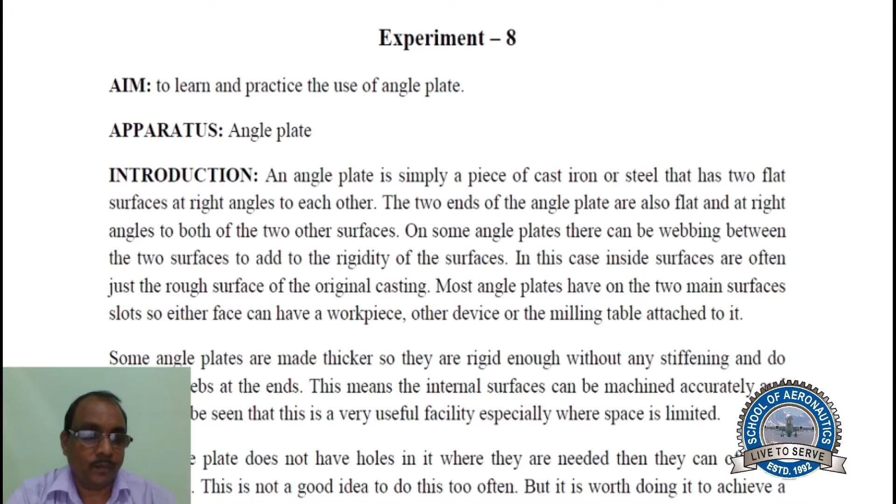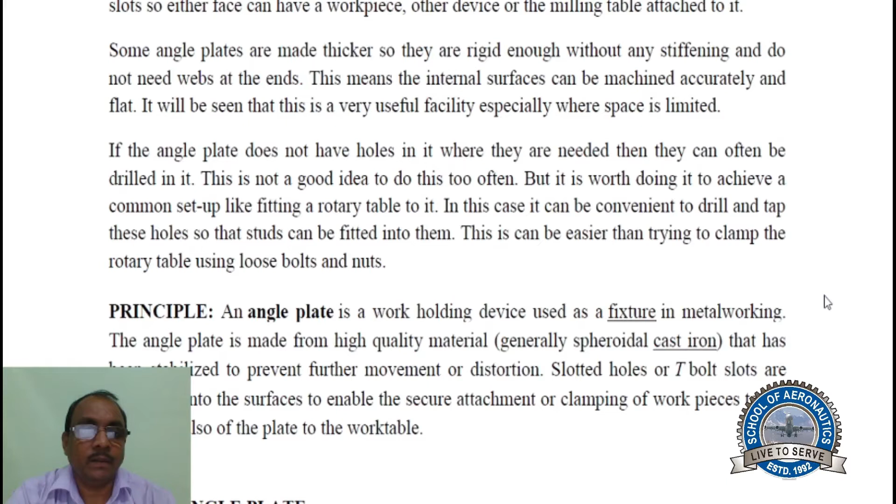If the angle plate does not have holes in it where they are needed, then they can often be drilled in. This is not a good idea to do too often, but it is worth doing to achieve a common setup, like fitting a rotary table to it. In this case, it can be convenient to drill and tap these holes so that studs can be fitted into them.

This can be easier than trying to clamp the rotary table using loose bolts and nuts.

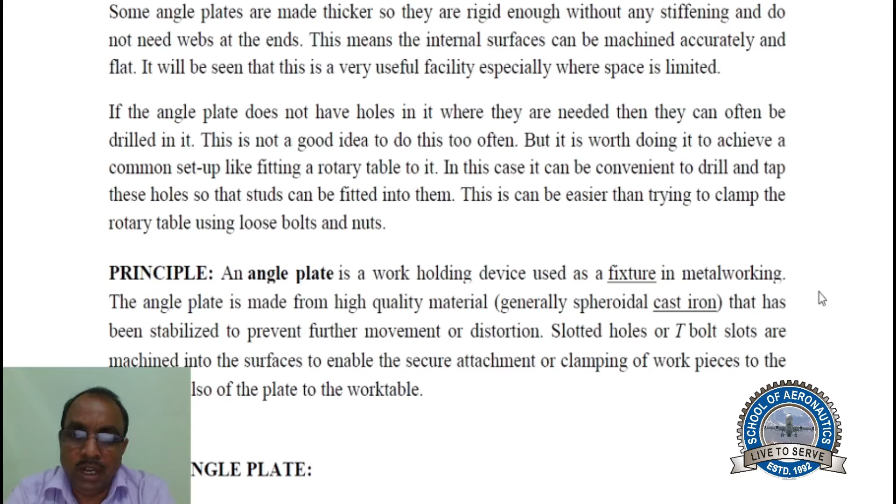Principle. An angle plate is a work holding device used as a fixture in metalworking. The angle plate is made from high quality material that has been stabilized to prevent further movement or distortion.

Slotted holes or T-bolt slots are machined into the surfaces to enable the secure attachment and clamping of workpieces to the plate, and also of the plate to the work table.

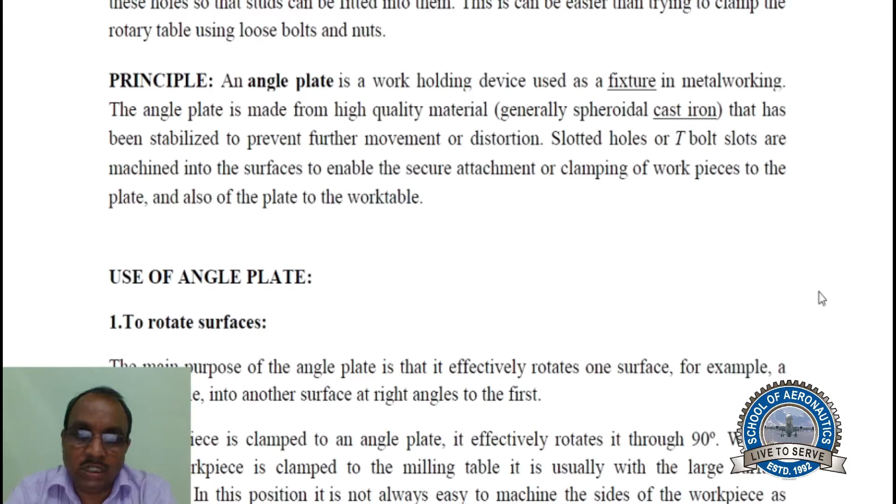Use of angle plate. First, to rotate surfaces. The main purpose of the angle plate is that it effectively rotates one surface, for example a milling table, into another surface at right angle to the first. If a workpiece is clamped to an angle plate, it effectively rotates it through 90 degrees.

When a flattish workpiece is clamped to the milling table, it is usually with the large surface horizontal. In this position, it is not always easy to machine the sides of the workpiece as might be required. But if we use an angle plate to turn it through 90 degrees, we can easily machine the sides.

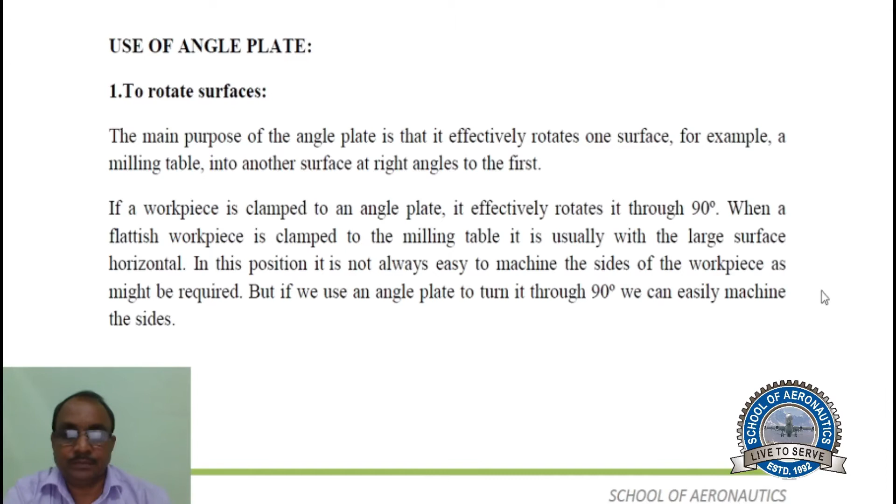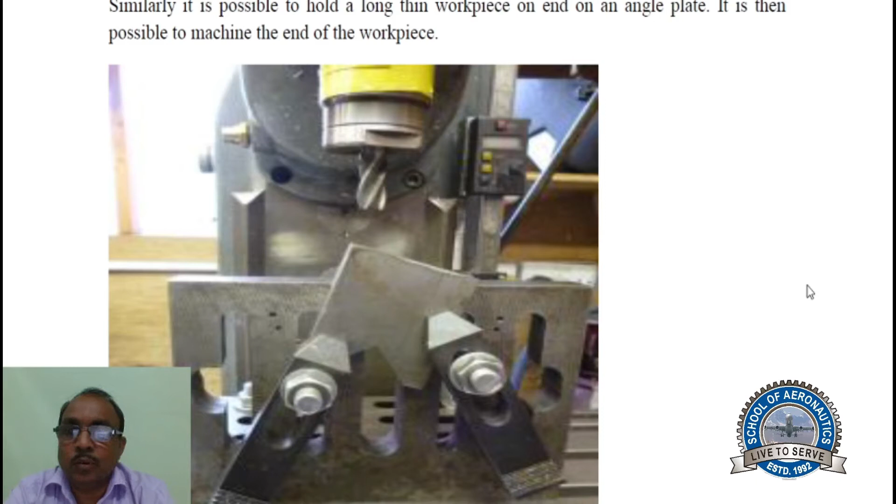Similarly, it is possible to hold a long thin workpiece on end on an angle plate. It is then possible to machine the end of the workpiece. This shows holding a workpiece on an angle plate to machine its sides.

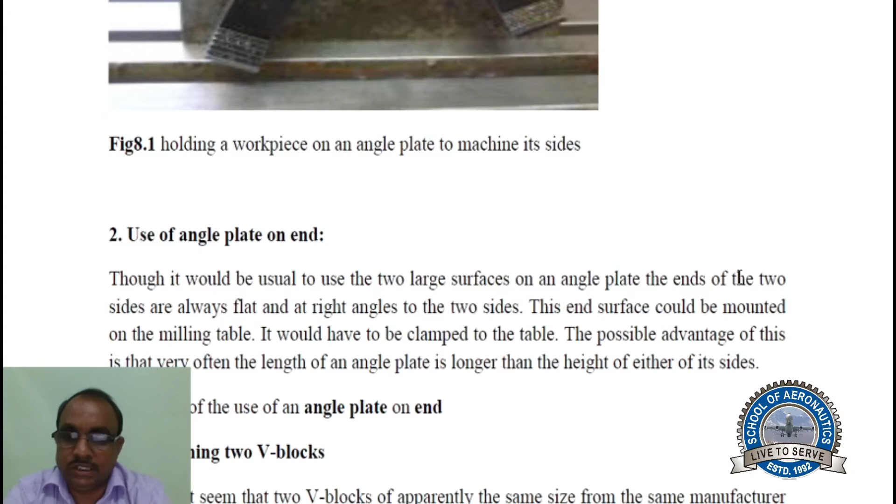Use of angle plate on end. Though it would be usual to use the two large surfaces on an angle plate, the ends of the two sides are always flat and at right angles to the two sides.

This end surface could be mounted on the milling table. It would have to be clamped to the table. The possible advantage of this is that very often the length of an angle plate is longer than the height of either of its sides.

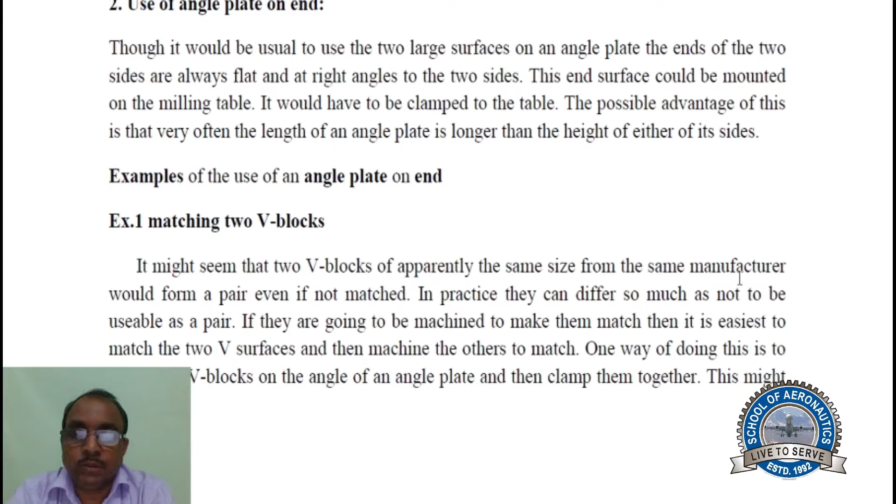Examples of the use of an angle plate on end. Example 1: matching two V blocks. It might seem that two V blocks of apparently the same size from the same manufacturer would form a pair even if not matched.

In practice, they can differ so much as not to be usable as a pair. If they are going to be machined to make them match, then it is easiest to match the two V surfaces and then machine the others to match.

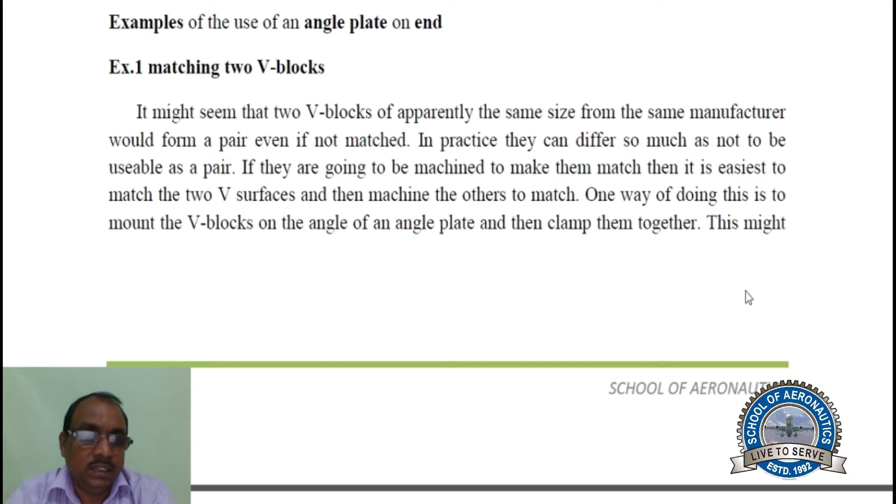One way of doing this is to mount the V blocks on the end of an angle plate and then clamp them together. This might necessitate drilling holes in the webs so they can be bolted together.

Then the other surfaces on the V blocks can easily be machined to match each other.

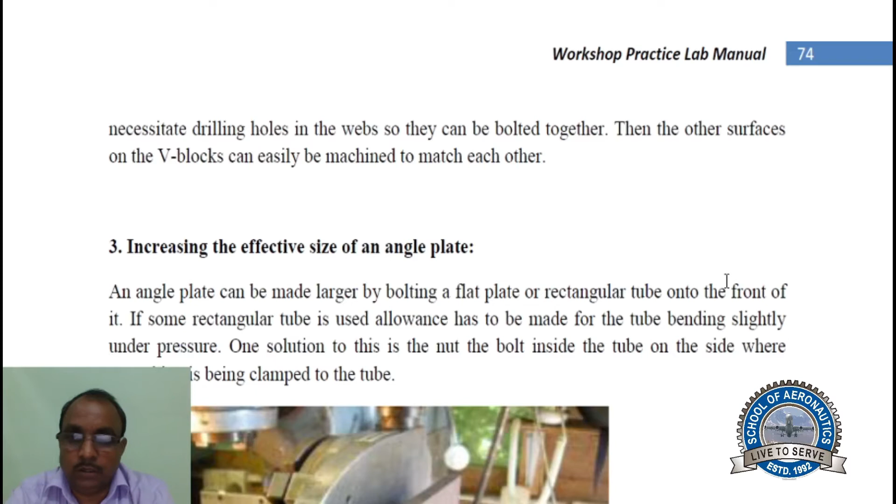Increasing the effective size of an angle plate. An angle plate can be made larger by bolting a flat plate or rectangular tube onto the front of it. If rectangular tube is used, allowance has to be made for the tube bending slightly under pressure.

One solution to this is to nut the bolt inside the tube on the side where something is being clamped to the tube.

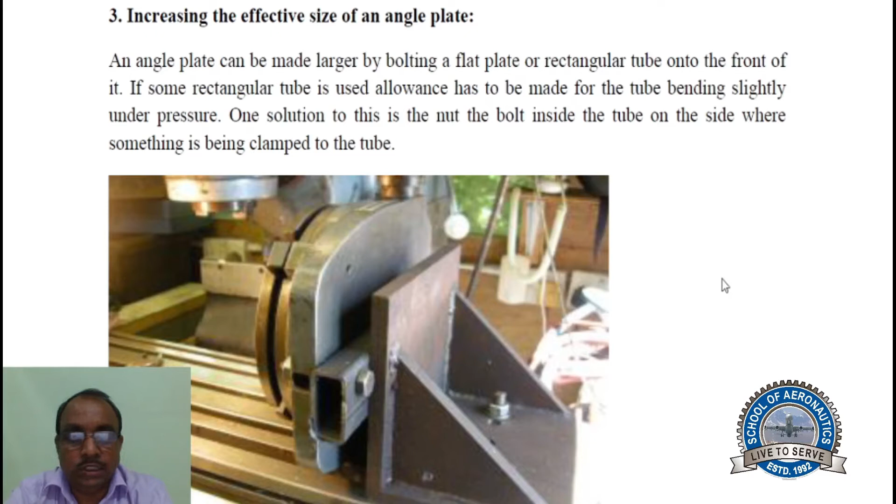Use of an angle plate for aligning. An angle plate can be seen as being equivalent to a square but of much greater thickness. Because of this, it can be used to align two edges at right angles but where one is at a different height to the other. This can be used for aligning vices.

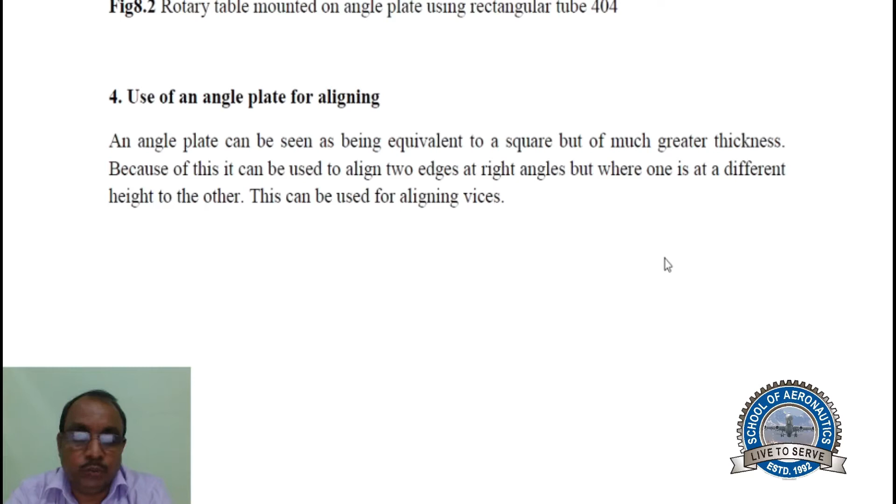Use of an angle plate as a stop. An angle plate bolted to the milling table to one side of a vise can be used as a stop when holding a workpiece in the vise. There is more on this under vices.

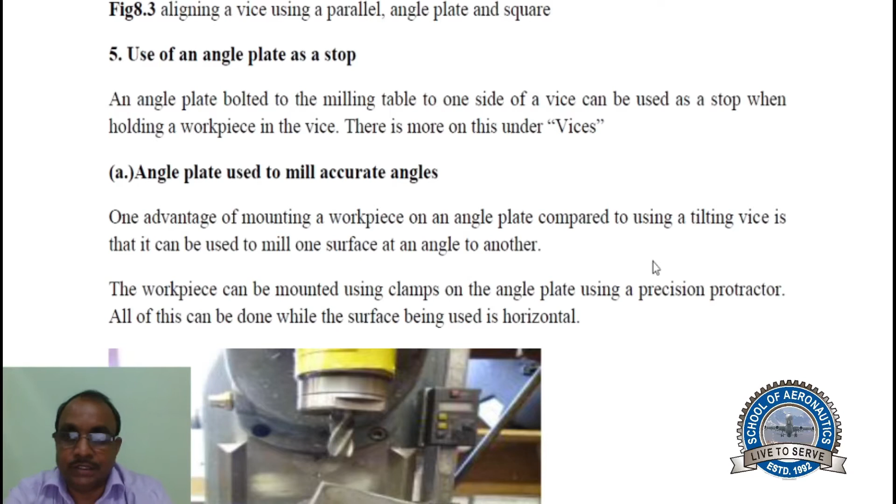Angle plate used to mill accurate angles. One advantage of mounting a workpiece on an angle plate compared to using a tilting vise is that it can be used to mill one surface at an angle to another. The workpiece can be mounted using a clamp on the angle plate using a precision protractor. All of this can be done while the surface being used is horizontal.

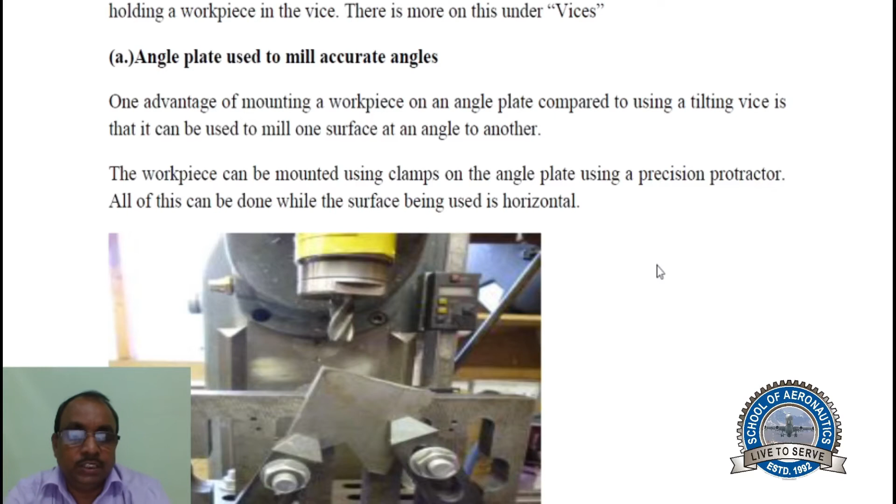Any method that could be used to align a workpiece clamped on the milling table, such as fences, could be used here. Machining flutes on connecting and coupling rods.

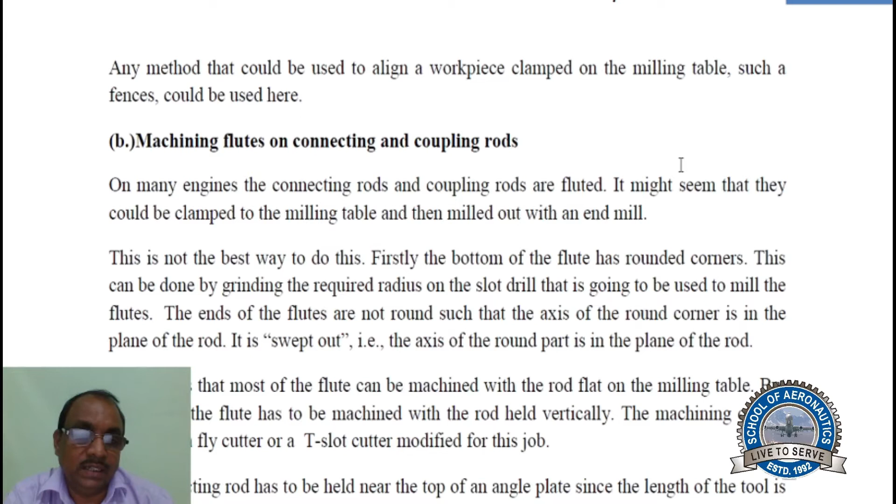On many engines, the connecting rod and coupling rods are fluted. It might seem that they could be clamped to the milling table and then milled out with an end mill. This is not the best way to do this.

Firstly, the bottom of the flutes has rounded corners. This can be done by grinding the required radius on the slot drills that is going to be used to mill the flutes. The ends of the flutes are not round such that the axis of the round corner is in the plane of the rod. It is swept out, that is, the axis of the round part is in the plane of the rod.

This means that most of the flutes can be machined with the rod flat on the milling table, but the end of the flutes has to be machined with the rod held vertically. The machining can be done with a fly cutter or a T-slot cutter modified for this job.

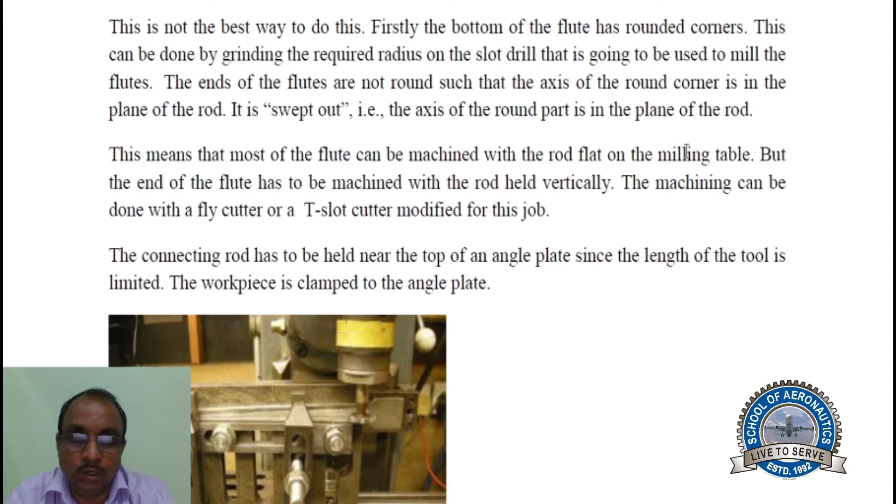The connecting rod has to be held near the top of an angle plate since the length of the tool is limited. The workpiece is clamped to the angle plate. If a connecting rod is fluted at all, then it is fluted on both sides.

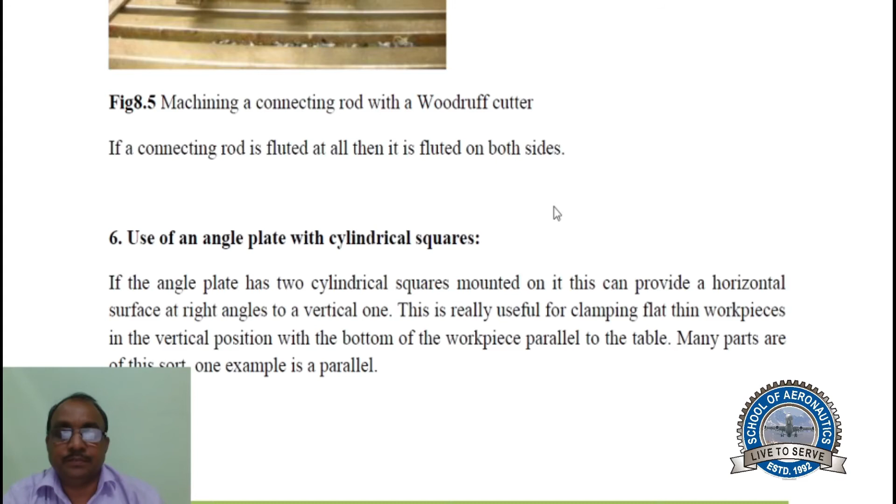Use of an angle plate with cylindrical squares. If the angle plate has two cylindrical squares mounted on it, this can provide a horizontal surface at right angles to a vertical one. This is really useful for clamping a flat thin workpiece in the vertical position with the bottom of the workpiece parallel to the table.

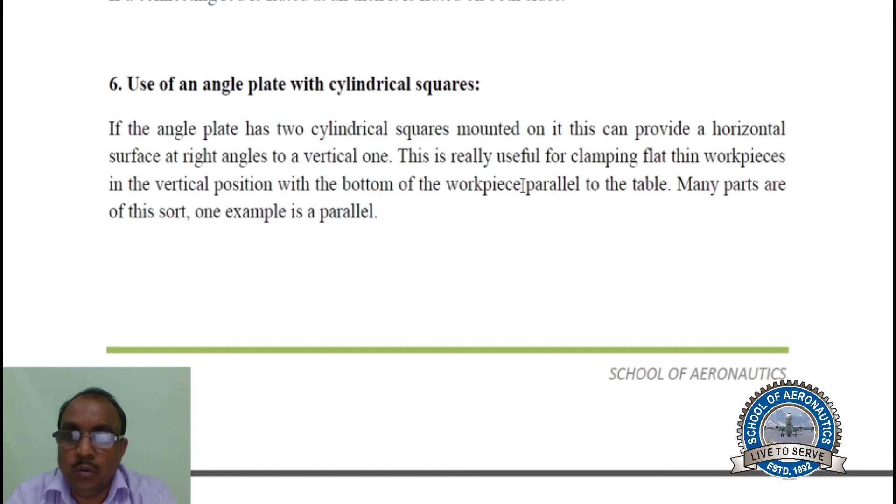Many parts are of this sort. One example is a parallel. The squares can be set to the same height using a height gauge. The workpiece rests on the cylindrical squares and is clamped to the angle plate. It would also be possible to make two or even more parts at the same time like this.

This is a situation where only one clamp might seem to be enough for light machining. It would be with a thick workpiece, but it would not be enough to stop a thin workpiece vibrating.

The top of the workpiece is machined with whatever will give the best finish. The part is removed and any burr removed from it. It is returned the other way up and milled to the width required.

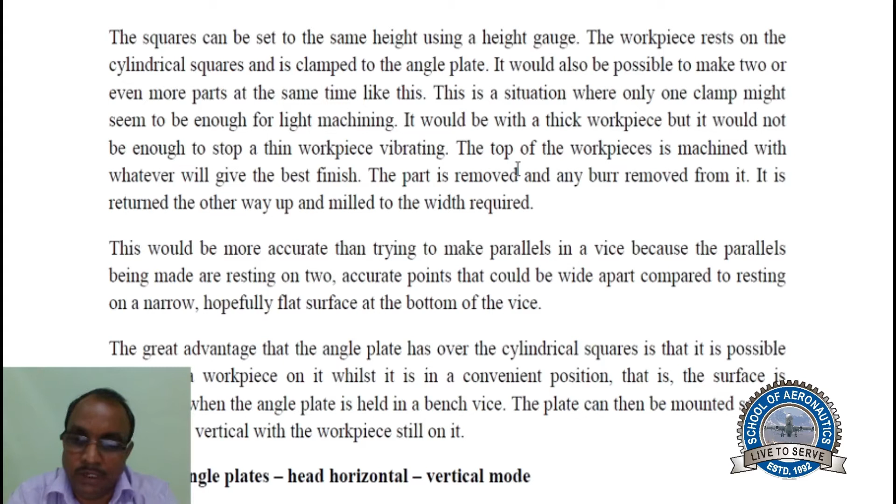The great advantage that the angle plate has over the cylindrical squares is that it is possible to mount a workpiece on it whilst it is in a convenient position, that is, the surface is horizontal when the angle plate is held in a bench vise. The plate can then be mounted so this face is now vertical with the workpiece still on it.

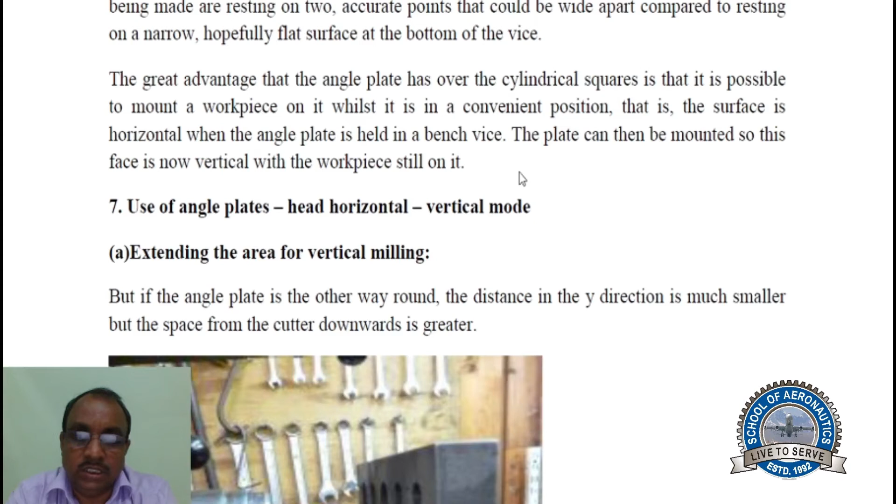Use of angle plates, head horizontal, vertical mode. But if the angle plate is the other way round, the distance in the y direction is much smaller, but the space from the cutter downwards is greater.

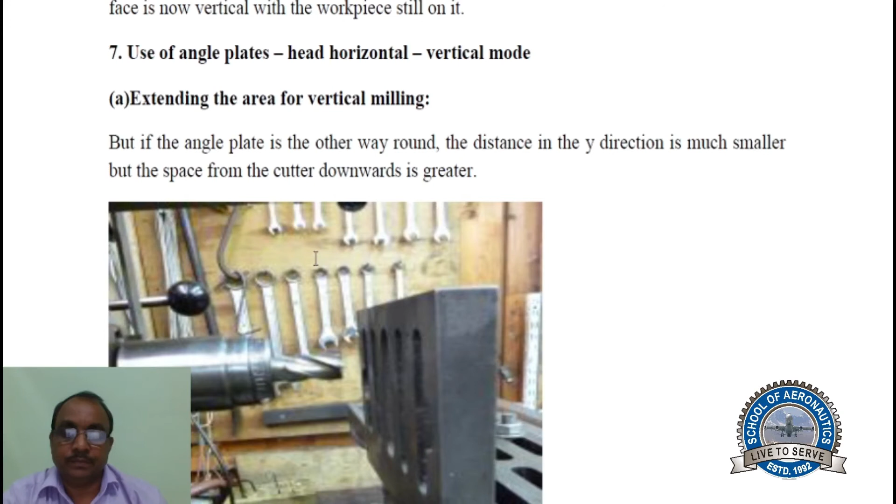This configuration allows in principle for the user to use a horizontal milling machine as a vertical milling machine. But it is easy to see that it is very difficult for the user to see what is going on.

It is also difficult to set up the workpiece, not only because it is inaccessible but because the surface is vertical. The only way to do this is to take the angle plate off the machine, fit it in a vise, and mount the workpiece with the surface horizontal.

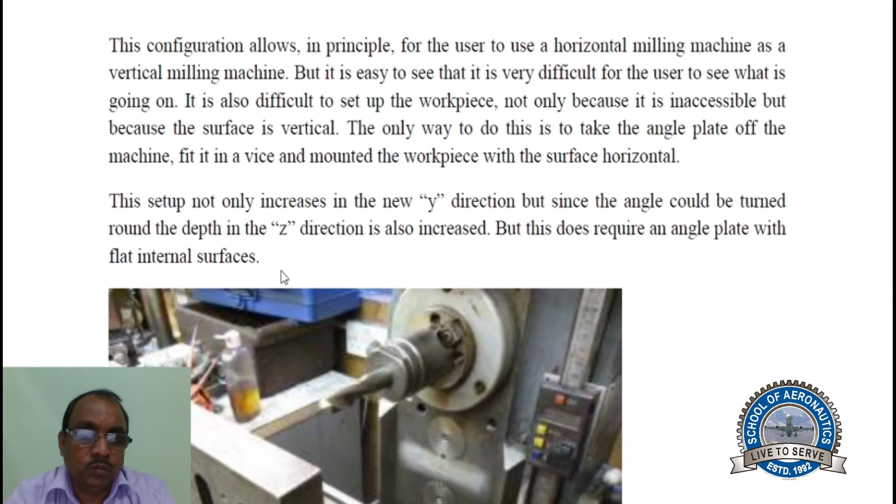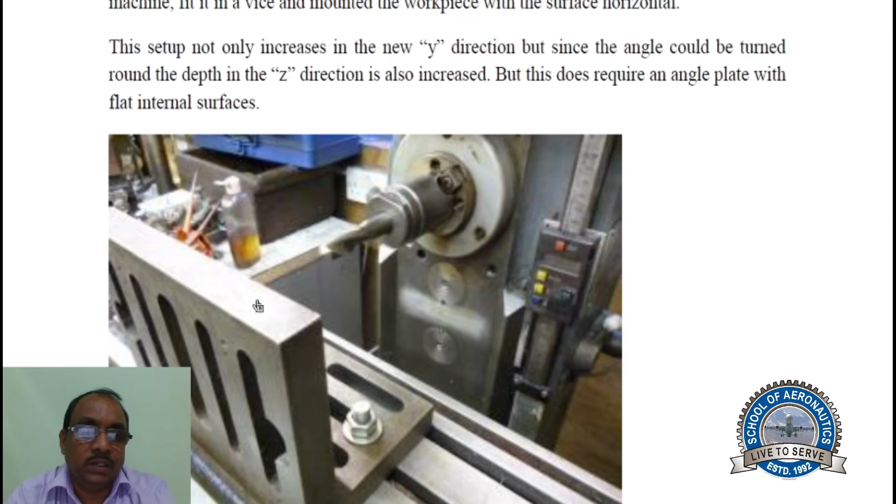This setup not only increases the new y direction, but since the angle plate could be turned around, the depth in the z direction is also increased, but this does require an angle plate with flat internal surfaces.

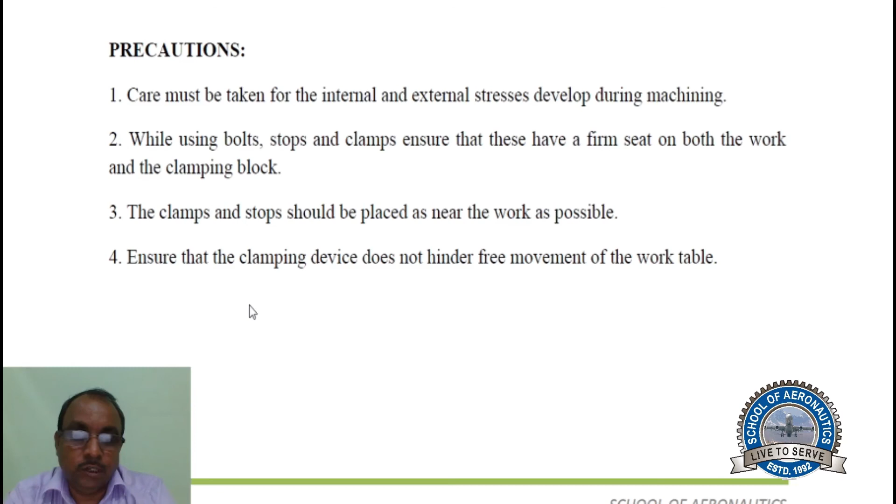The clamps and stops should be placed as near the work as possible. Ensure that the clamping device does not hinder free movement of the work table.